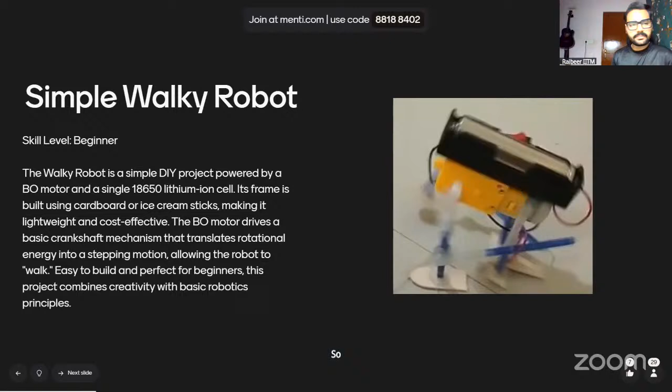Okay, so we are using here a BO motor, battery operated motor, and we are using the 18650 lithium ion cell. This bot is very lightweighted and very cost effective, and this is a very beginner level project. It hardly takes 1 or 2 days to build if you put some time into it. So that was it about the introduction on the simple walking robot.

This is a display of the assembled components. In this robot, we have some components which have been assembled to bring out a crankshaft motion so that we can convert the rotational energy of the DC motor into a walking motion. For that, we are using the crankshaft phenomenon, which I'm not gonna dive deep into right now, but we'll be dealing with this in the actual lectures once we are done with the introductory session today.

So yeah, as of now, crankshaft motion is just a phenomenon which brings out a walking motion out of the rotational motion in the DC motor. So that is all you need to know now.

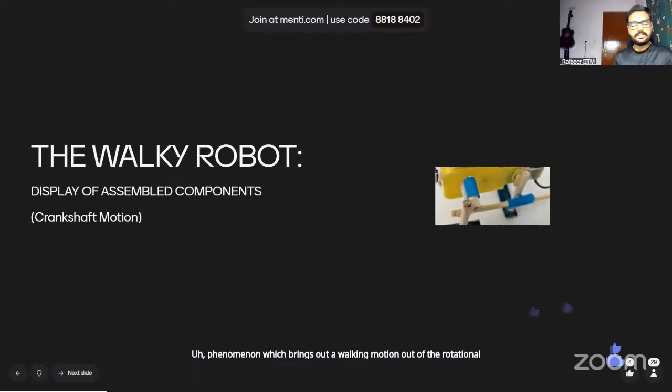So moving on to the components of the walking robot. Firstly, we have the BO motor, which is the battery operated motor. This is a DC motor, and this motor operates on 7 volts to 12 volts, but in our project we'll be confining it to 3.7 to 4 volts, which is the specification of the voltage of the lithium ion batteries we are using.

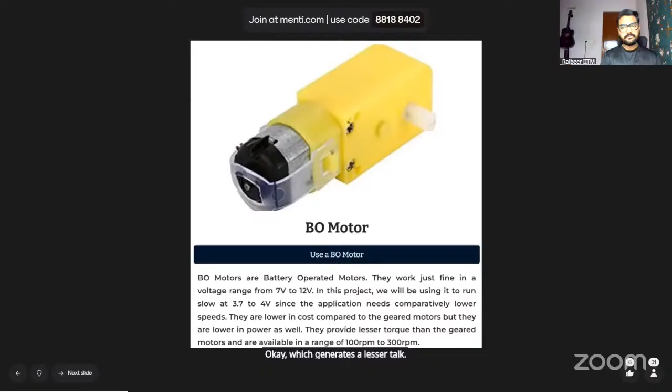As you know, in this project we are dealing with a walking robot, not the other projects which my friend TAs are handling, so we'll need a walking motion rather than a rotational motion. That is why we'll be dealing with a comparatively less RPM motor so we can have a slow and steady walking motion, not a rolling motion like the projects my friend TAs are dealing with. So we'll be looking at 100 RPM to 300 RPM motors so the motion of the walking robot can be steady, which generates a lesser torque. And we are using this DC motor, not a geared motor.

So the next component is the 18650 battery, a lithium ion cell battery. What makes it special is its longevity and that it can be recharged. Unlike use and throw AA batteries, these batteries can actually be recharged and you can use them for n number of times you want.

In this battery, we'll be using the variant of 3.7 volts, which is the operating voltage we are looking at for our DC motor. And the dimensions of the battery are mentioned on your screen, which you can see is 65 mm.

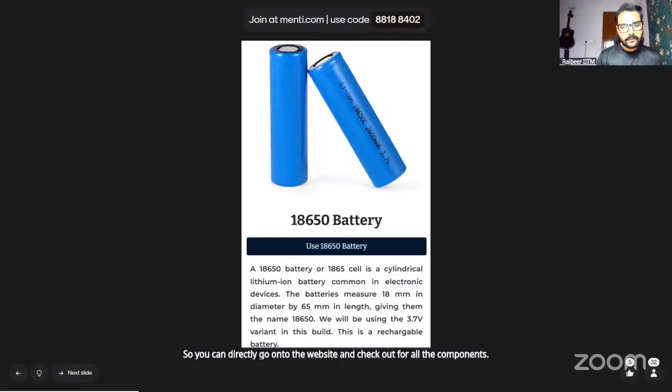Moving on to the next component, the 18650 battery holder. We'll be needing a battery holder for a stable electrical connection to the DC motor and a proper electrical supply of power. With that, we come to the end of the three core components of the walking robot, which will be very essential for building it. The walking robot's components are basically divided broadly into three parts.

Firstly, we have the core components, secondly we have the additional components, and thirdly we have some tools which are not components of the walkie robot but play an essential role in building and assembling the components.

The three core components play an essential role in the functioning of the walkie robot: firstly the battery operated DC motor, secondly the 18650 lithium ion cells operating at 3.7 to 4 volts, and thirdly the 18650 battery holder. These components will also serve as the body, frame, and structure of the walkie robot.

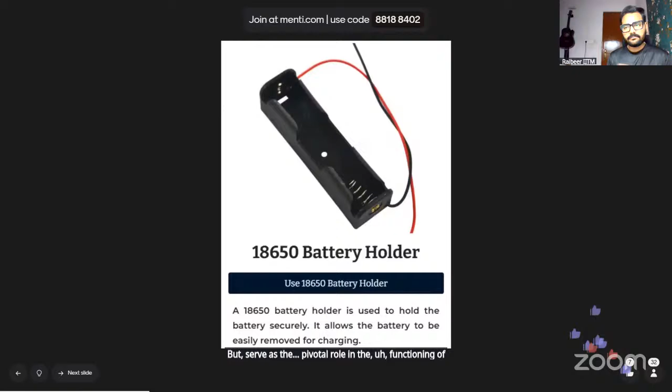Other than this, we'll have some additional components which are not core components, not directly involved in the functioning of the walkie robot, but serve a pivotal role. So now we'll be moving on to the other components.

Okay, on your screens you can see all the components being spread out. Sorry to interrupt, maybe we can wrap the other tools very fast since we're running out of time and need to cover other things. Yeah, definitely, students might be familiar with other tools anyway.

So we have all the components and tools spread out on your screens. You can see the three core components of the walkie robot: the battery operated DC motor, the lithium ion cells, and the battery holder.

Apart from these, we have additional components not directly involved in the functioning of the walkie robot, but which serve an essential role in its walking motion: ice cream sticks and gel pen refills. These will be crucial for building the legs of the walkie robot, and we'll also bring in the crankshaft motion using the shafts of the DC motor along with these ice cream sticks and gel pen refills.

In detail, we'll brief you guys in the lectures. But as of now, this is a quick wrap on the introduction of the walkie robot.

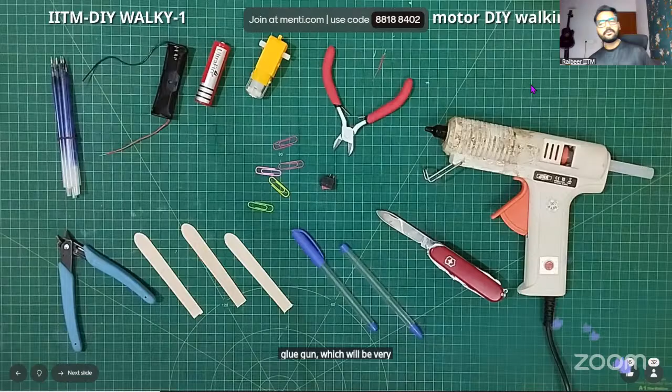Also on your screens, you can see a glue gun, which will be essential for assembling all the components. Next, we have the website here.

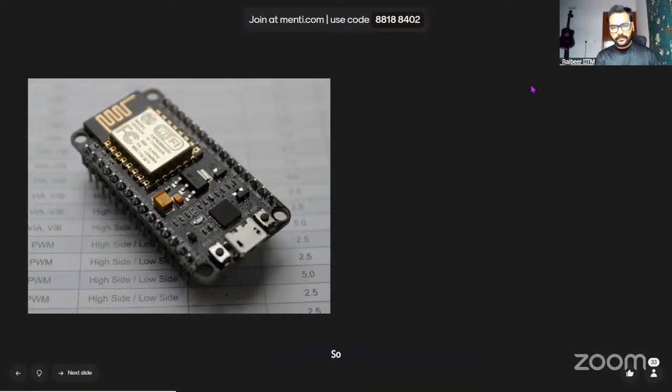Yeah, certainly. So hi everyone, I am Namai. I hope I'm visible and audible, right? I think your video, camera is not... is it off? Well, one sec. Is it better now? Yeah, it's better. Okay, one sec.

Hi everyone, I am Namai, and I am your teaching assistant for ESP8266. We've heard a lot about this, and even if you haven't, this is a very popular microcontroller. It comes in the classic black PCB, but apart from how it looks, it has 4 MB of flash in it, which makes it pretty versatile for storing code and data.

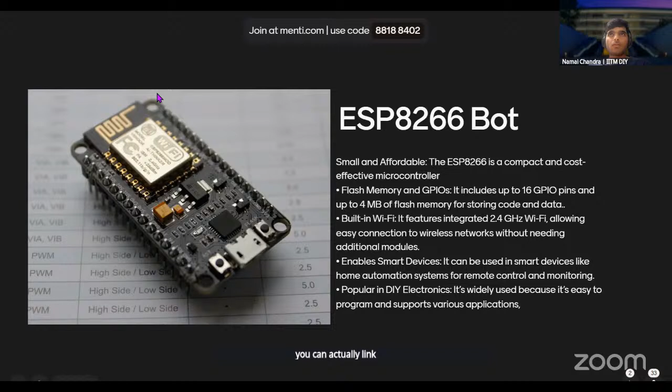That makes it a very popular tool for IoT applications and DIY electronics, be it making something static like a bulb converted into a smart bulb—you can even link that up with Alexa. So even after we're done making the bot, you could hypothetically remove that microcontroller, attach it with a relay, and convert your home into a smart home. You can link all your appliances, be it your fan or lights, with a relay, and for the signal use this ESP8266 board with a web server based app, connect everything to your Wi-Fi, making for a very nice, interesting home automation project build. All of that and much more we will touch upon in our sessions very soon.

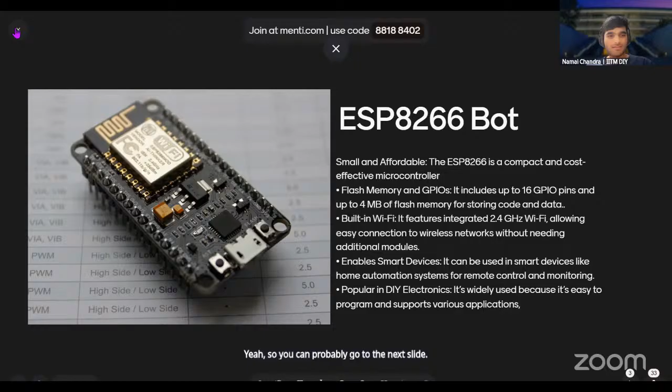Rajveer, could we go to the next slide? Am I audible? I hope I am. Yeah, you are audible. Just click on the next arrow. No, man. There'll be small buttons maybe on the bottom left or bottom right, or you can use your arrow keys if previous. Yeah, you can use keyboard arrow keys also, bottom center maybe. Thank you.

So talking about the wheel orientations or the wheel options that you have, you can either choose to make it with regular wheels or you can choose to make it with Mecanum wheels. Both of them are fun. If you're going for that speed, race car, RC car kind of a build, go for regular wheels. It's super fast and the low latency helps you get that nice RC feel. If you want more maneuverability and some nice looking fancy maneuvers, go with Mecanum wheels, and even that would exaggerate the performance.

On to the next one. It's pretty understandable. Mecanum wheels would allow you motion in more axes, and I'll leave it up to Vivek to cover that. But I'll cover regular wheels here because they're the fastest ones. Typically people build RC cars for speed, so if that's you, go with regular ones. But if you want something novel and unique, go with Mecanum ones. On to the next one, please.

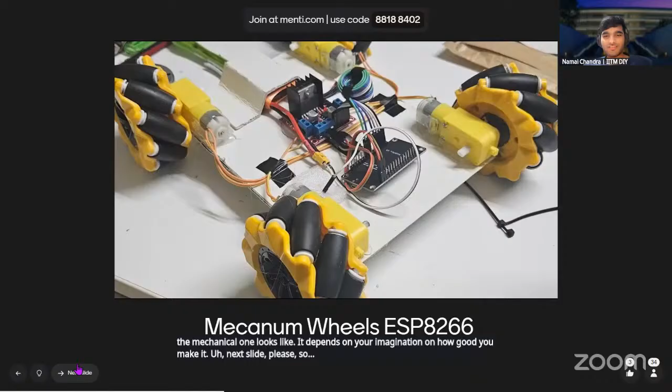Why does a four-wheel Mecanum robot need two dual motor drivers? Well, in a Mecanum wheeled robot, when it has to maneuver in a certain orientation, it needs all four wheels spinning in different directions, independent of each other. Whereas one motor driver is only capable of giving two output signals. We can reproduce that signal and hook two motors on each side, getting four motors working from a single motor driver for a normal wheel bot. But once you're into a four-wheel Mecanum with full functionality, you need two motor drivers — that's the simple math.

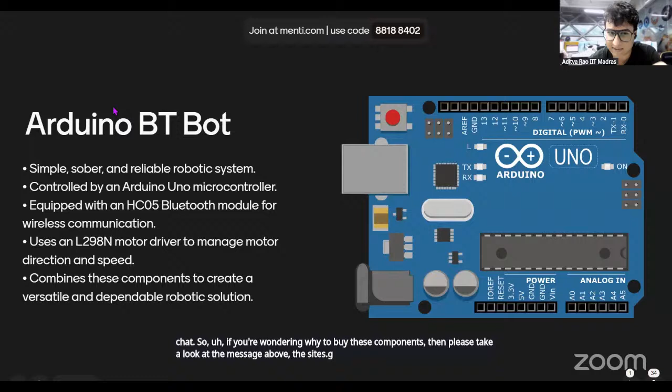So we'll combine these components: the L298N motor driver, the HC05 Bluetooth module, and the Arduino Uno board, along with the motors and wheels, to build a successfully moving bot which you can control using your Android smartphone. Maybe you can proceed to the next slide, Rajveer.

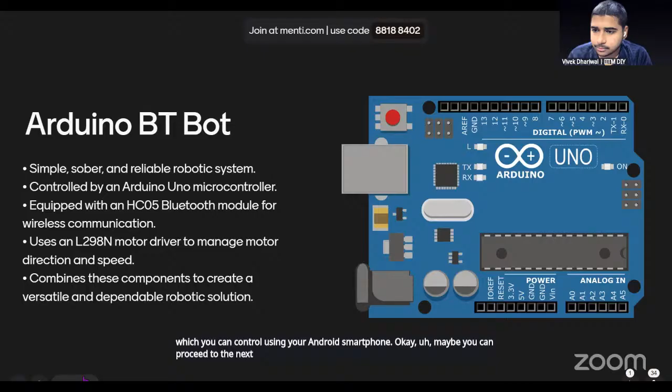This is the image of the final bot that you'll also see in the lecture. We'll learn how to do the hardware part, the coding part, the debugging part, and all. The application you can see in the bottom left on an Android smartphone is the one you'll be using to control the bot. Next slide, Rajveer.

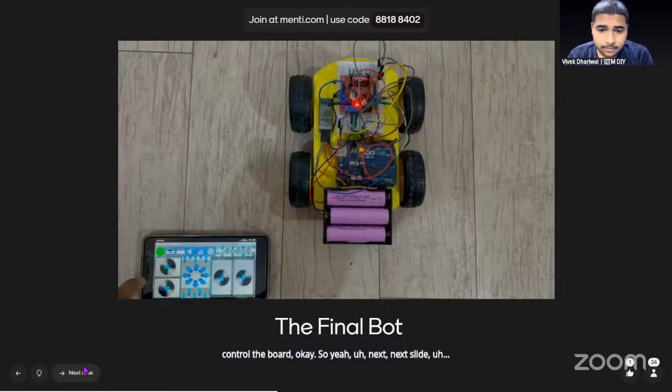In all the microcontrollers we'll be having here, not only Arduino, not only ESP, we'll have two variants: one with normal wheels, one with mecanum wheels. And even within that, you have two more choices: one with a single motor driver board, and one with a dual motor driver board. If you want the full functionality mecanum wheel bot, you definitely have to use two motor drivers.

So this is the mecanum wheel bot. We'll have separate videos for all those students, but this video won't be available on the portal. On the portal, you'll only see the mecanum wheel variant for Pico. If you need to build it for ESP or Arduino, interested students can just tell us in the respective WhatsApp groups, and we'll share the video, the code, and even some live sessions on demand with you.

Mecanum wheels are just awesome. They work in omnidirectional movements, and movements such as sliding, left, right, forward, diagonal, and many more. We'll talk about this more in further sessions. So this was just an overview.

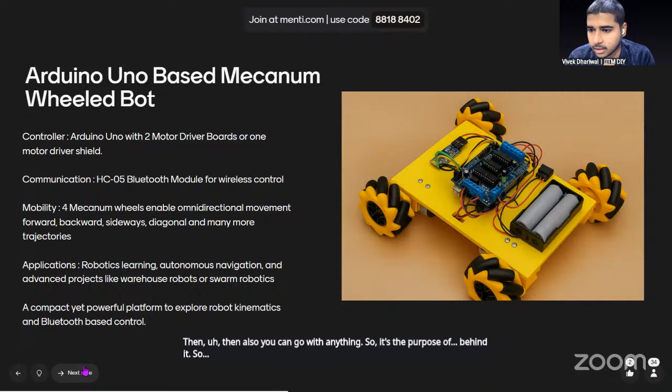So there's one question: which wheel is better? Actually it completely depends on your usage—what purpose are you building the bot for. If you just want to learn, you can go with anything. It's the purpose behind it, it's completely up to you. Next slide, please, Rajveer.

These are the full flex functionalities and movements which can be achieved through the two motor drivers: forward, backward, left, right, forward-right, forward-left, backward-right, backward-left, turning right, turning left, curved trajectory, and lateral arcs. These are the full functionalities of a fully functional mecanum wheel bot, and this can only be achieved with two motor drivers. Next slide, Rajveer.

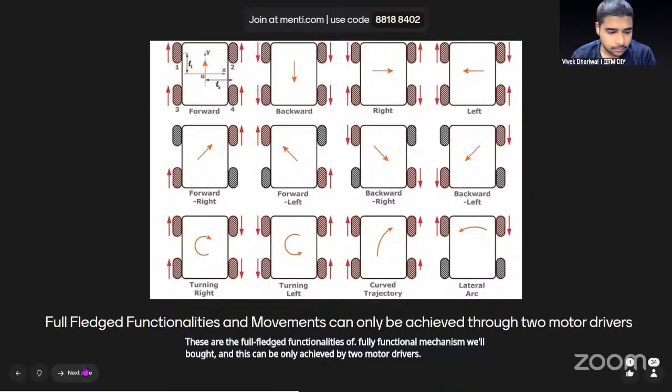I think Namai also covered this part: why do we need two motor drivers to build a fully functional mecanum wheel bot? First is independent control—to build a mecanum wheel bot, you need independent control on each wheel, on each motor, so that's why we need two motor drivers. One motor driver controls two motors, so it's simple math that two drivers are needed for four motors. The result is you unlock true omnidirectional movement, as shown in the previous slide. That's really great. Next slide, Rajveer.

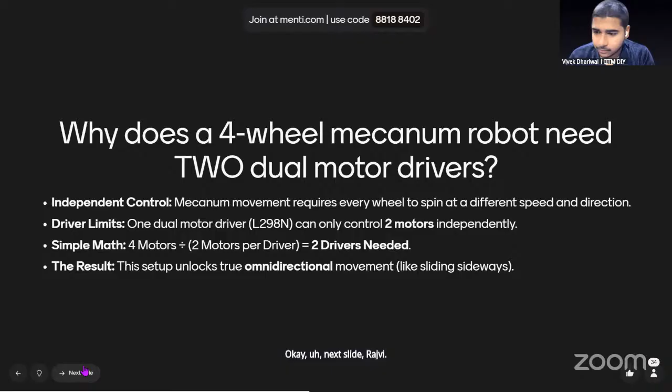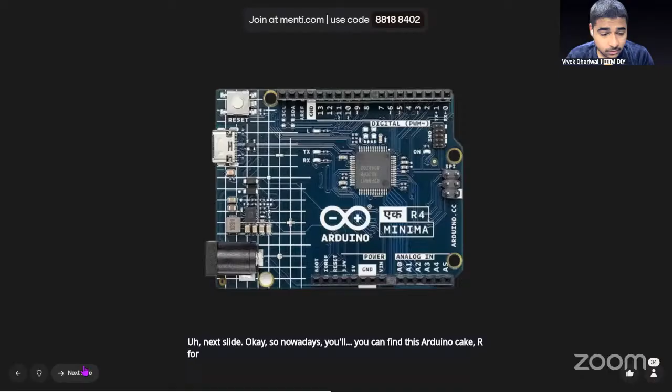Okay, so nowadays you can find this Arduino Uno R4 Minima board as well. Next slide, please, Rajbir. So here's the information about the Arduino Uno R4 EK.

So this is a bit more advanced, you can say, microcontroller than the general Arduino Uno. It's a 32-bit Renesas RA4M1 microcontroller, and it runs at 48 megahertz clock frequency. It has 32 KB of RAM and 256 KB of flash memory. Very less than the ESP or Pico, but comparatively more than the normal Arduino Uno board that we get. It also has all the other logic the same, like the 5-volt logic. All the other Arduino Uno shields are compatible with it. Its peripherals are really advanced, a bit improved, you can say.

And even this R4 Wi-Fi version is also available if you need the inbuilt Wi-Fi capabilities. It has the ESP32S3 chip inbuilt, so that is a bit more costly, but it completely depends on your budget and your choice if you want to go for it or not. So next slide, Rajbir.

Yeah, so I think we are done with Arduino, right? Maybe we can take the questions at the end. Also, Rajbir, could you please check if the questions are enabled, because I was expecting a few questions by this time, just like last time. So could you just check that? I guess people aren't able to put up their questions.

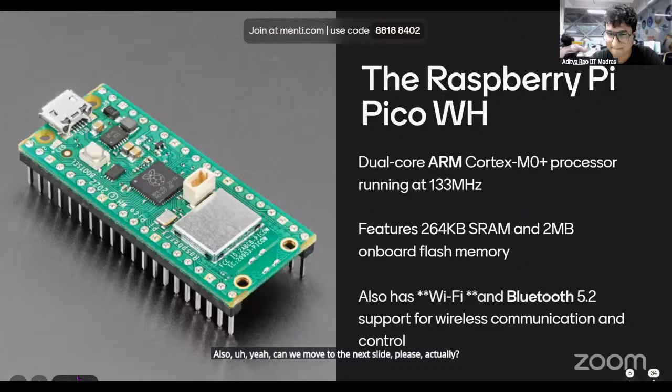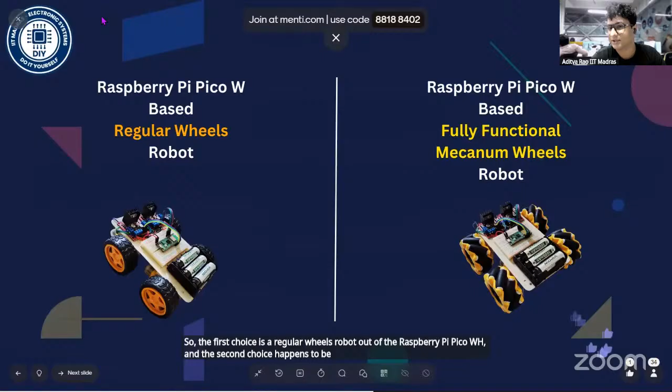For the Raspberry Pi Pico WH-based robots, we have kept things simple. We've given you two choices: the first is a regular wheels robot, and the second is a Mecanum wheels robot, again based on the Raspberry Pi Pico WH. Both of these robots have two motor drivers. The best part is if you choose to build your robot with regular wheels, you can build it with two motor drivers and then simply purchase the wheels later and retrofit them into your robot. That is how simple it is.

Don't worry if you didn't understand what I just said, I will certainly be taking you guys through the flow in the live sessions after you make your selection. You have two choices - one for regular wheels and one for Mecanum wheels - for which you mandatorily need two motor drivers to achieve full functionality, or you'll just end up wasting your money with a single motor driver. To achieve all sorts of movements, you have to use two motor drivers, and these are L298N motor drivers.

You can see how they look - they have that sharpener kind of thing, that's how I identify them. The sharpener kind of thing is actually the heat sink, and it comes with a red PCB. That's how you identify that. Let's move to the next slide.

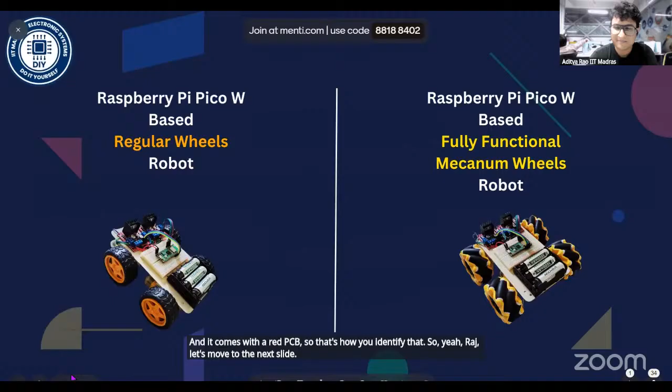Now that brings me to the most awaited event - even this year I get a lot of DMs from my batchmates at IIT Madras about RoboSoccer 3.0. We organized this event in June 2025, myself and Rajbir, which was extremely popular. This was the venue - it was completely packed almost the entire day, and we had to do crowd management so people weren't pushing each other. It was a very popular event, with people coming from multiple departments, even professors.

Janki Raman sir was our mentor for this event, and he's also my personal mentor because he has been supporting me constantly ever since I joined this program. He also brought in a couple of other professors from other departments just to see this. The best part is all of these robots were made using microcontrollers just like this one, and we also had a couple of RF-based robots, but that's a totally different lineup if you want to explore that.

So this is what RoboSoccer was. We will also have the fifth edition - we just wrapped up the fourth edition a couple of days ago, again with the help of Rajbir. The fifth edition will happen on campus in June 2026, where we'll be doing the exact thing you see in this image all over again. Let's move to the next slide, please.

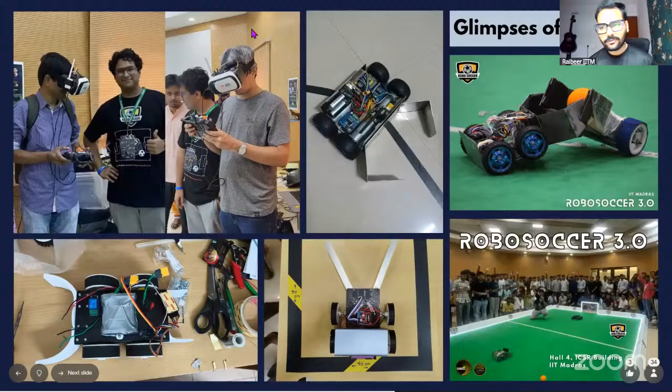I guess the winner of RoboSoccer, his bot is visible on our screen right now. Yes, thank you so much for pointing that out, I totally forgot. On the top left, top right and top center, you can see that bot - it belongs to Biplab, who was the winner for this event. He also won RoboSoccer 4, and that's a really great thing. So that's the winner's robot.

If you want, you can take a screenshot and try to get some inspiration from that. I'll leave you to it, but the choice is yours. Anyway, let's move to the next slide.

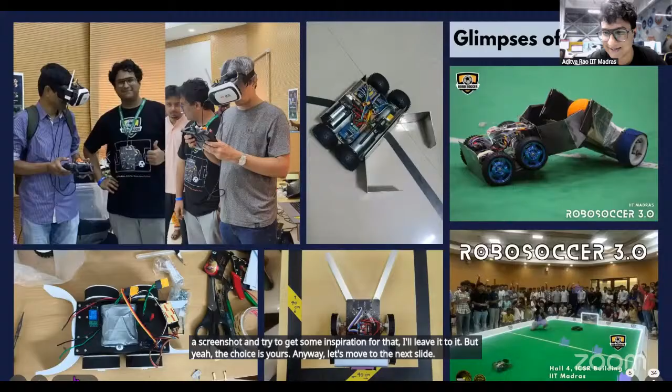Now this was one of the most important slides. Part of this RoboSoccer event goes to my team - I have Rajbir, Sivaraman, and Shruti, along with Amrita and myself. I wasn't directly involved this time because I was the deputy secretary, but I was definitely invited as a host of this event and as a student mentor.

That was the best part about doing this. And of course we have Professor Janakiraman and Professor Nitin, along with the entire team and the Paradox Technicals team. The technical events department is under whom we conduct this event, and the best part is the technical events department is going to go through a lot of changes this time. Anyway, that's another story, but I hope you enjoyed this little sneak peek into what originally gave birth to this program, this concept of teaching you guys how to build your robots.

So yeah, we can move to the next slide. I guess this is another important slide, as I always say - okay, all slides are important, don't mind that. But yeah, two motor drivers, this concept is important. So listen to this.

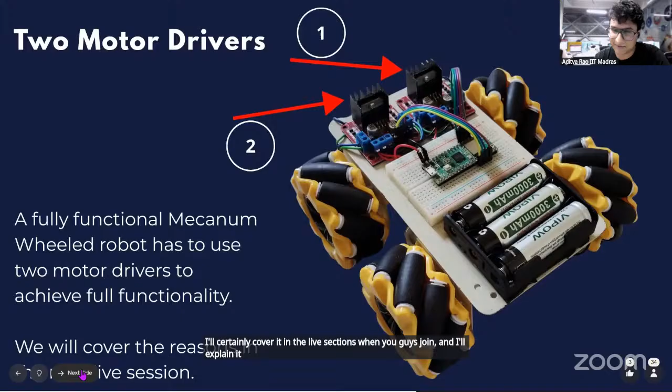Two motor drivers are critical for you to build your robot with Mecanum wheels, only to ensure that it is completely functional, fully functional Mecanum wheel based robot. The reason behind this, as I already said, you need to have all-wheel drive with Mecanum wheels to achieve full functionality with all the maneuvers on offer. The other reasons, the concept and principles behind how these work, I'll certainly cover in the live sessions when you guys join, and I'll explain it to them. All right, let's go to the next one.

Let's go to the next one. So, as I said, fully functional Mecanum robots is what we will be building with the Raspberry Pi Pico WH. The Mecanum wheels robot is fully functional if it can perform all of these maneuvers, including but not limited to what you see on the screen. These are maneuvers that cannot be achieved if you're using just a single motor driver, so that's important to keep in mind.

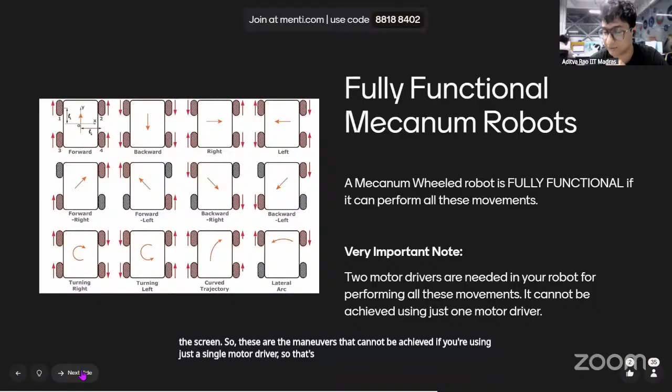This brings me to the actual backbone and foundation of this robot: the GitHub code. So I put all my code on GitHub. If you're wondering what GitHub is, think of it as Google Drive - on Google Drive you share your photos and store your videos, and GitHub is a place like that, but only for your code and programs.

Please explain how to make an AI chatbot - for that you'll have to join the session. I'll certainly take that up in the conclusion part, in the Pico session.

Now another interesting part is the addition of the magic button. This is quite new - it didn't exist a couple of months back, this is a new addition I made. Believe it or not, this was based on a recommendation that a student like you, part of the School Connect program in electronic systems, put up to me during a general conversation in the PicoWH live session. This is the latest feature, let's switch to the next slide to see what actually happens.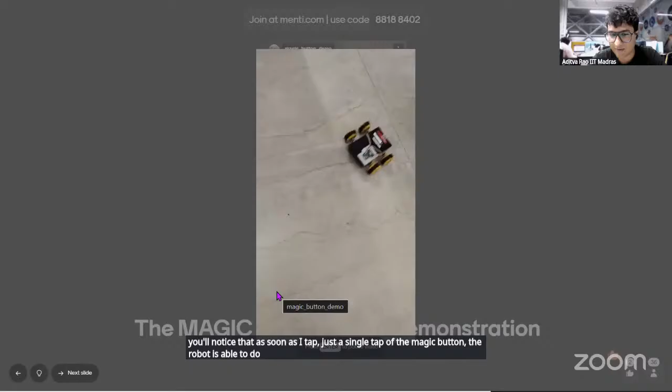This video is actually a live demonstration of the magic button. You notice that as soon as I tap, just a single tap of the magic button, the robot is able to perform that amazing maneuver without me doing any sort of control on my mobile phone. All of that happened with just a single tap, and that's why I wanted to show you a live demo.

Okay, dark theme is also there for all of you dark theme lovers out there, including myself. You will get it as _dark or something on the GitHub where you'll get access to it. Let's go to the next one.

This is the new addition for the Pico WH based regular wheels. So people building a regular wheels robot, don't worry, I have got you covered as well. You'll be able to use the magic button and all of its functionalities with your regular wheels robot. You can code it to do literally anything, for example, go forwards, take a right, go forwards again, take a right again, and do that square sort of pattern as you saw in the video. So you won't feel left out, I have taken care of that. Let's go to the next one.

The most latest edition is, of course, a demo video won't be necessary at this point because you guys are pretty clear as to how all of this works. I'm confident that you guys are more than capable to understand what's going on.

The most interesting addition is a themed control panel for the magic buttons. This is the improved user interface I was talking about. These are the magic buttons, and you'll see the background - I've set it to the Formula One movie theme, the movie poster. But you can customize it to absolutely anything you want. You just need to download that image, save it in your gallery, and then click the small button on the top center, Choose Theme. Select the image, and boom, your control panel is fully customized. That's the best part about this, customizable control panels are also an option. I do see people really interested by the reactions. Let's go to the next one.

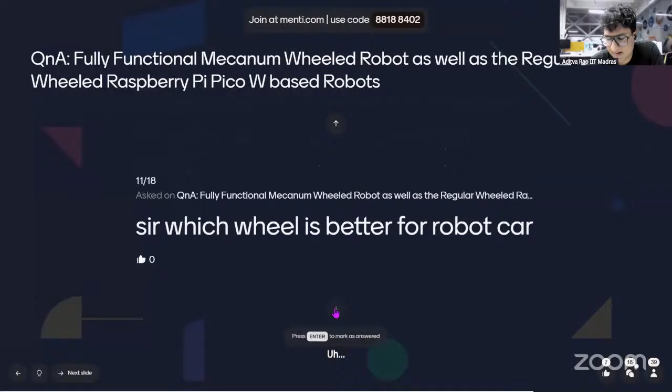Same questions. Okay, let me just see.

Can I learn more about open house? Oh okay, thanks a lot for reminding. I'll come back to this, but about open house, I do have a really interesting thing to share with you guys. Before that, I have a question: can we make a robot car?

But yeah, the choice is yours, basically. You can choose to make a Walkie, or you can choose to make a microcontroller based robot.

Rajveer, could you just give me screen sharing for just 5 minutes? I have something interesting to share with all these guys. We just need to wrap up the questions first, I guess. We should ask the other TAs to also take up some questions. Yeah, definitely, sure, but I don't see them. I don't see them, is it Namaya? I see them.

Okay, about open house, not got gate passes. Well, the best part about open house is... okay Rajveer, I do think it's high time that we reveal it to the students. Okay, so let me just...

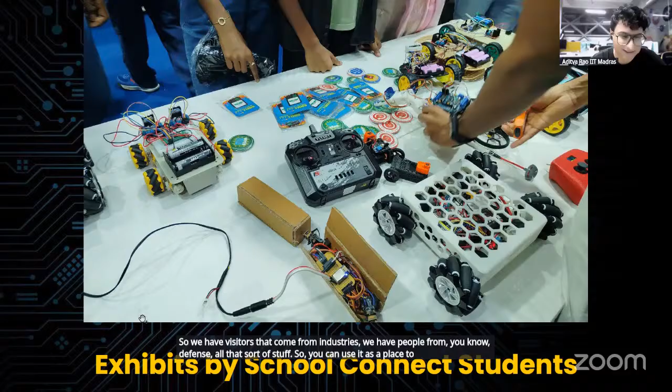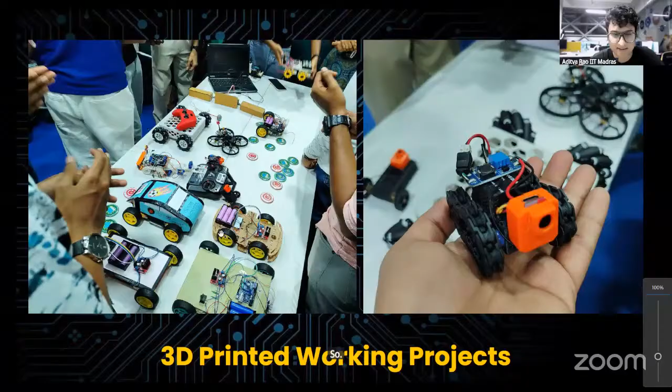We also had multiple 3D printed working projects made by the students themselves. On the right you can see a tiny miniature desktop tank, as Harshit likes to call it, that he completely 3D printed—even the tracks, even the chain—and it was controlled using an RC remote control panel. These projects were not just limited to the robots that we teach, but also anything that students made themselves.

We had Professor Janakiraman along with our TA for the Walkie project, Mr. Rajbir. It was an honor to meet the professor, who met with the School Connect students, the parents, and everyone else. Overall it was a really interesting experience and an amazing opportunity for all the students to network and showcase their skills in front of a real world audience, and that is why I want you guys to be a part of this.

Enter the exciting world of electronics. It is well known that IIT Madras is a hub for innovation, and by participating in this robot building program from the School Connect Electronic Systems course, you are taking your first step into this world class ecosystem. So make sure to keep this in mind and carry on with building your robots.

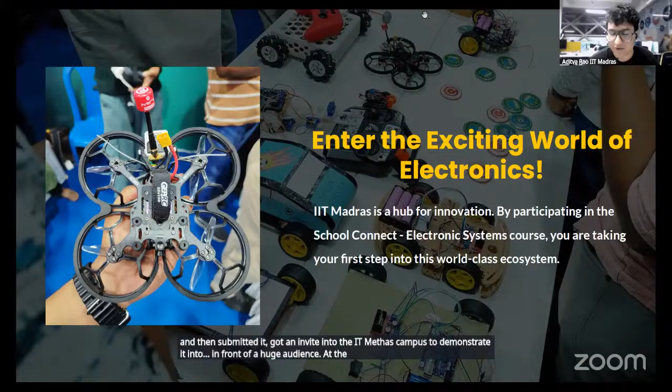So that was a small sneak peek into what Open House was. Overall, TLDR: it was an exciting opportunity for students who built the best robots, presented them really well, and submitted them, getting an invite to the IIT Madras campus to demonstrate it in front of a huge audience at the official IIT Madras stall. That opportunity is still open for you guys currently enrolled in this program. So yeah, I guess that was the end of my presentation.

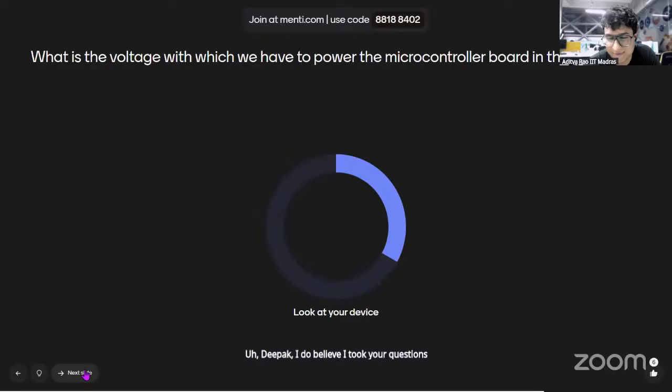Okay, let's start then. Deepak, I do believe took your question, but if you want to ask anything else, you can paste it in the chat, feel free for that. What is the voltage? Okay.

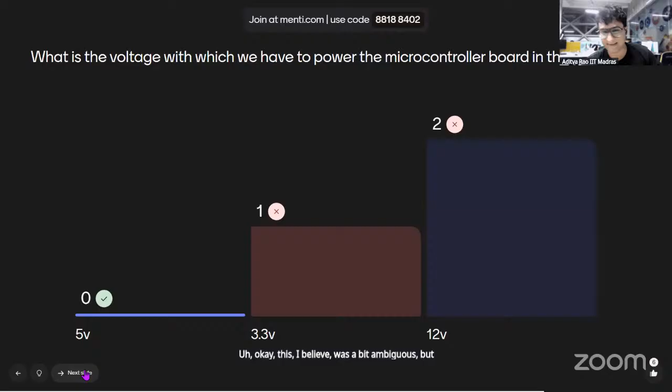All right, let's take a look at this. This I believe was a bit ambiguous, but no worries. It totally depends from microcontroller to microcontroller, but on average it is usually 5 volts, though 3.3 volts to 5 volts is the range you can assume. It depends, so don't stick to one and go for the wrong choice selection, or else you'll get magic smoke.

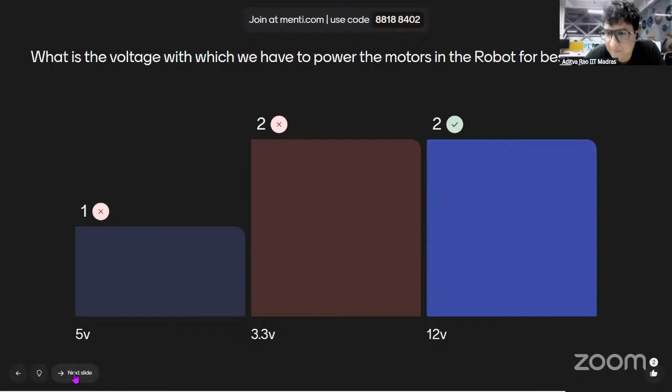All right, all perfect, let's go. Yeah Rajbir, you take over. All right, making fun.

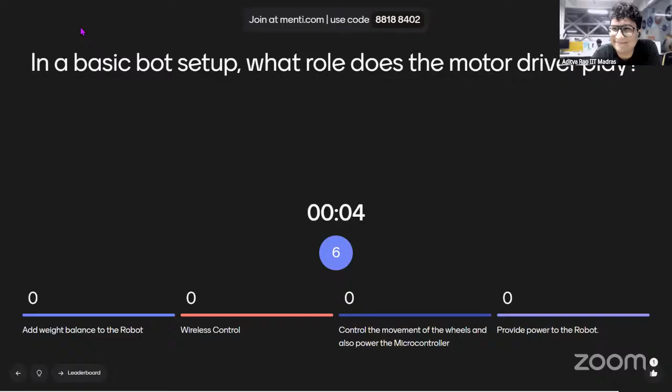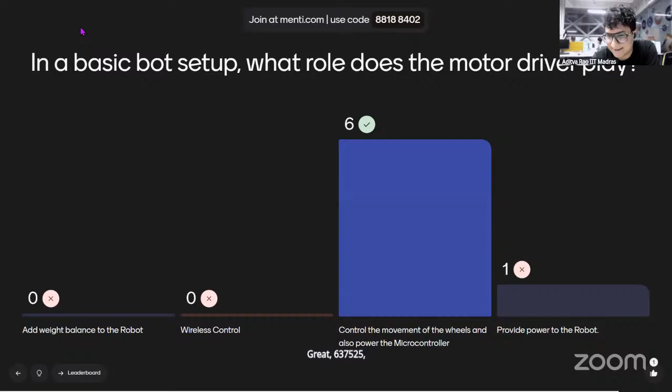Great, 6 people got this answer right. I guess let's head to the leaderboard now, we are almost done with the quiz. All right, Rajbir, please do the honors.

Okay, so we have Shubham here with the highest number of points, congratulations Shubham. It's Shubham, if I'm not wrong. Yeah, thank you. Congratulations buddy, I guess he was the fastest and got the most points. Yeah, that's correct. I think that really shows he was paying attention.

I think now we can move on to getting the feedback. We can take some specific feedback - if you guys are interested in talking about what projects you're interested in, or what your domain interest is, feel free to use this as an open playground. Maybe we can get a few more ideas and incorporate that in this batch as well. Yeah, definitely, that's a good idea. We certainly can, so guys, we are open to suggestions right now. Looking forward to completing the project. Awesome.